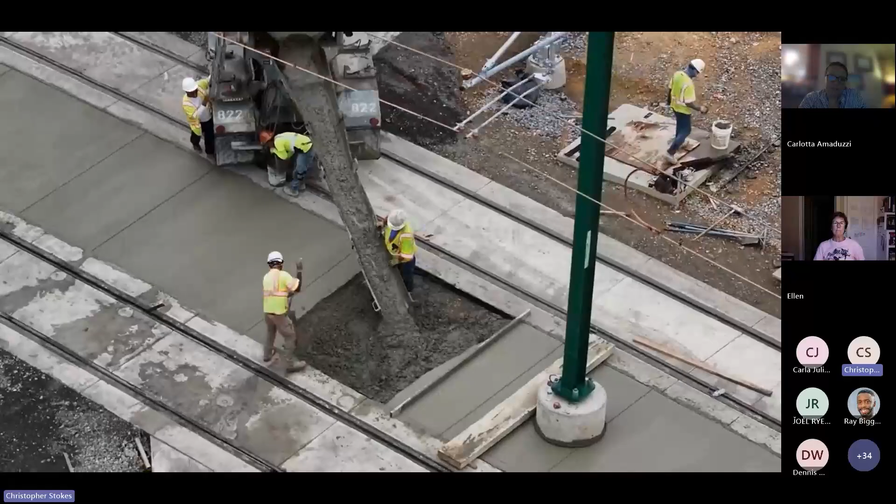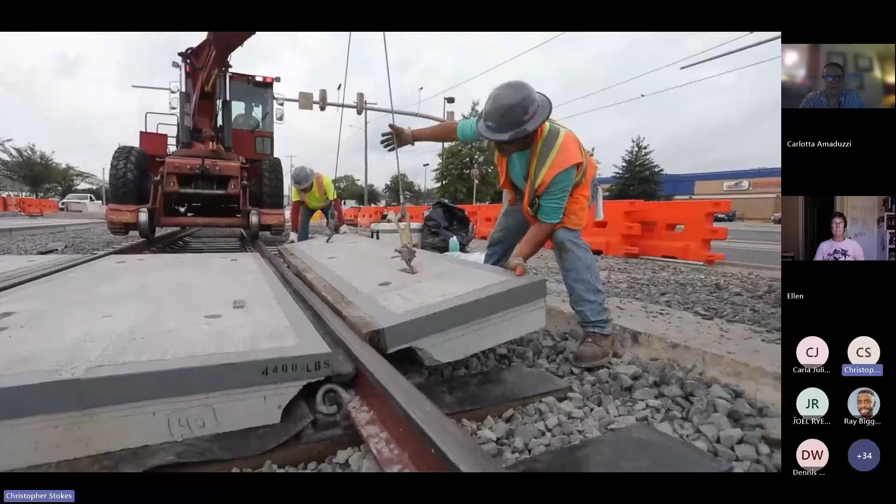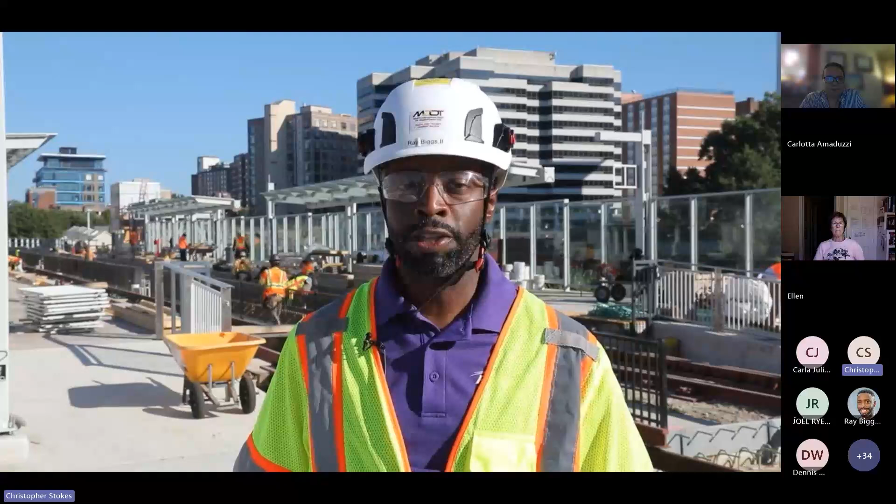It has truly been the year of transformation for the Purple Line project. With construction now more than 80% complete, the new Purple Line tracks tell the story.

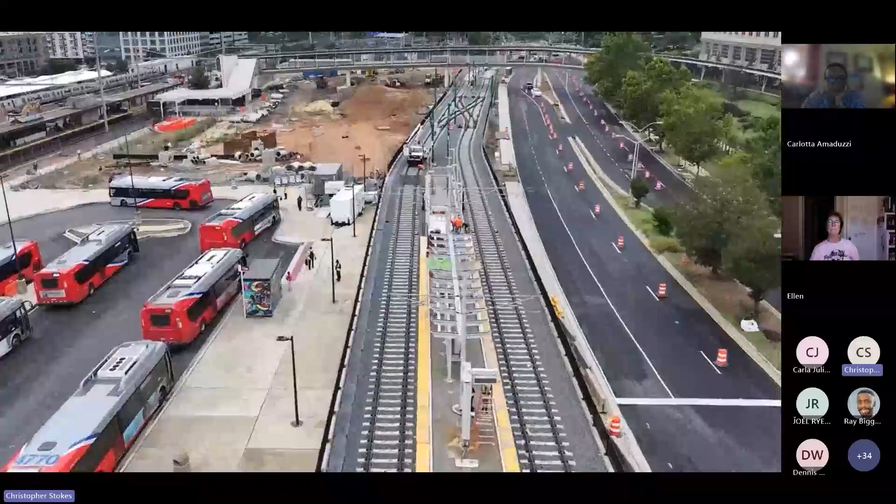We are excited to share that tracks have been installed across all of Prince George's County, with more than 75% of tracks complete across the entire project.

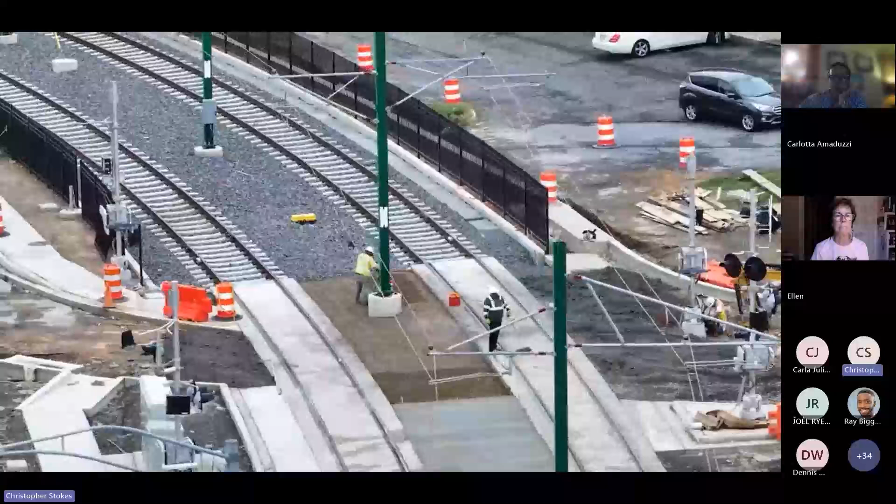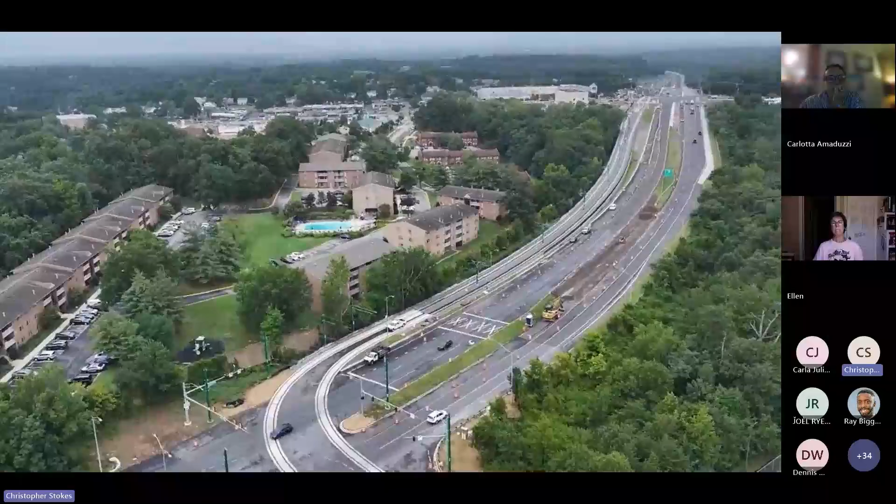Along with track installation, you have likely seen many overhead catenary system poles installed this year. These poles carry the wires that power the Purple Line. At the eastern end of the project, the poles and wires are not only installed, but have already been energized, ready to power up the light rail vehicles.

Just a reminder, always assume light rail system power is on. Please be sure to avoid the Purple Line right-of-way areas. Only cross at designated areas and crosswalks, and be sure to look both ways before you cross.

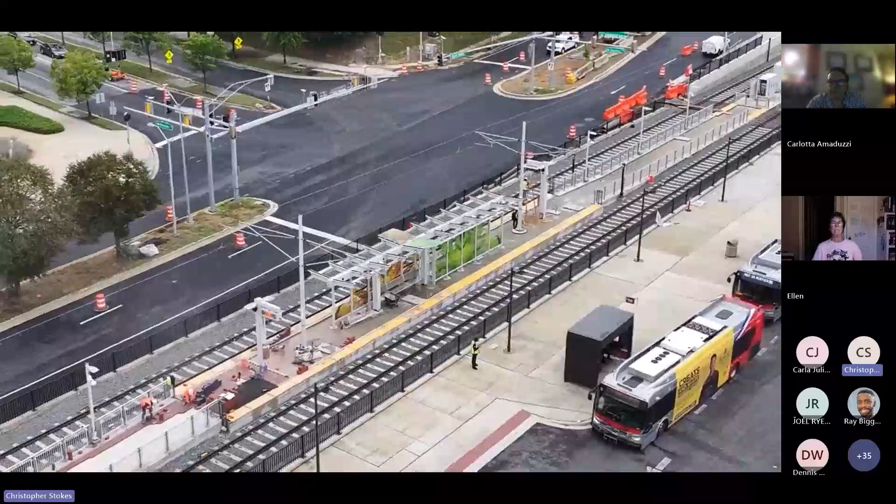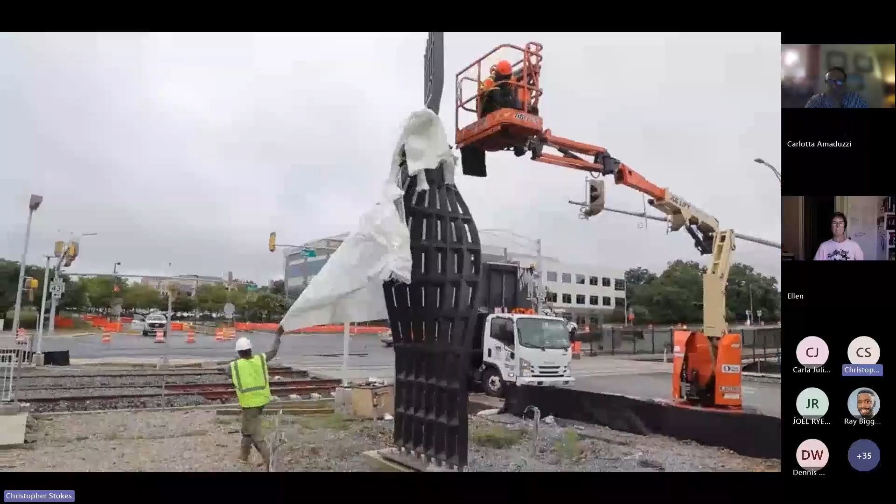Across the corridor, stations continue to progress. Canopies, benches, and Art in Transit installations are being added. Bronze spires in Riverdale, vibrant colors in Long Branch, and more to come.

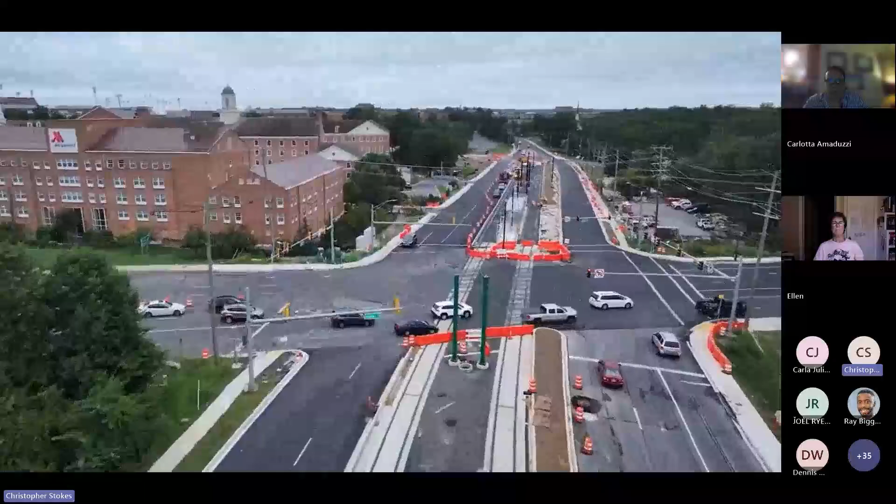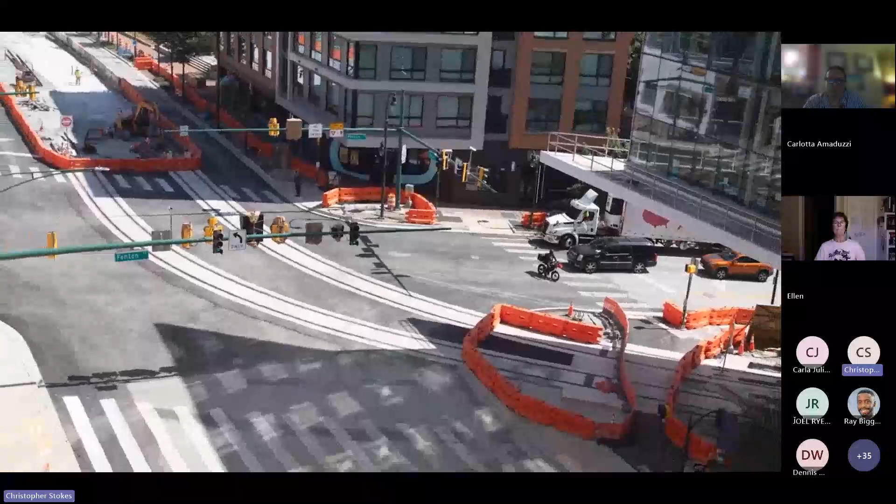More than 20 roadway crossings that once required detours are now in their completed phase, including the complex intersection of Wayne Avenue and Fenton Street. With the tracks in place, Silver Spring residents can see the vision of a more connected community becoming reality.

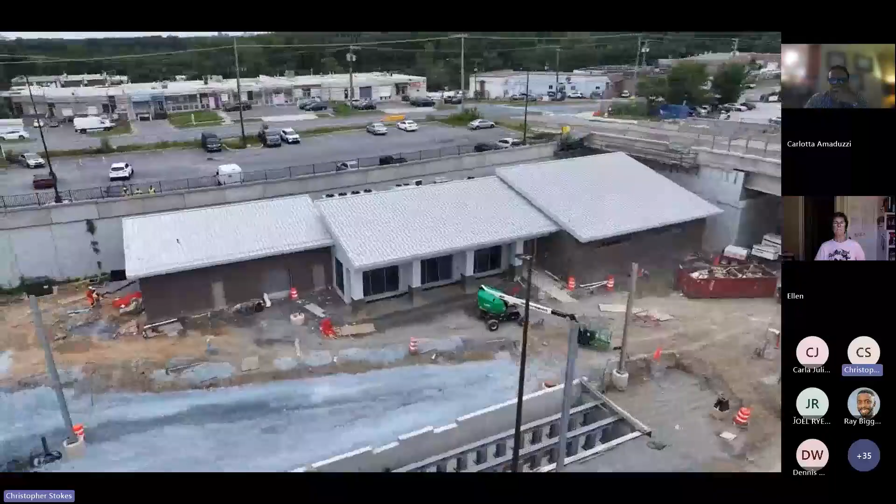In Lyttonsville, the second operations and maintenance facility is taking shape. This building and track yard will support the light rail vehicles with an additional control and communications facility and a smaller maintenance facility located in Montgomery County.

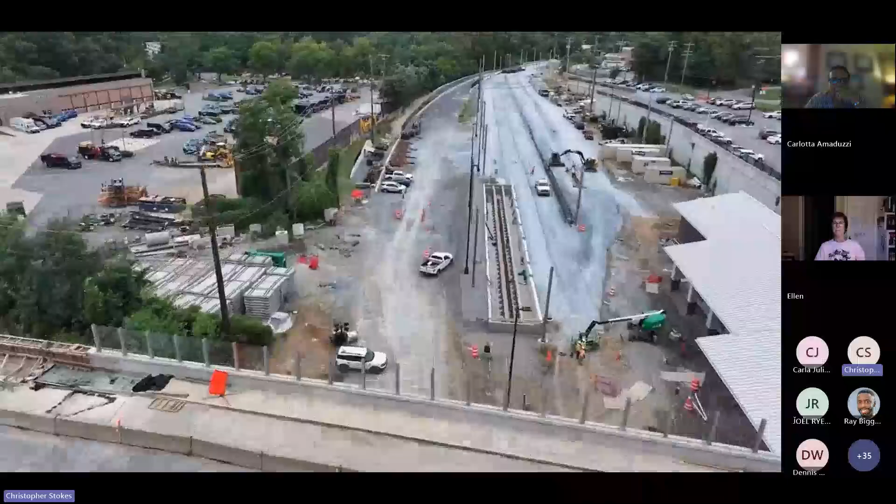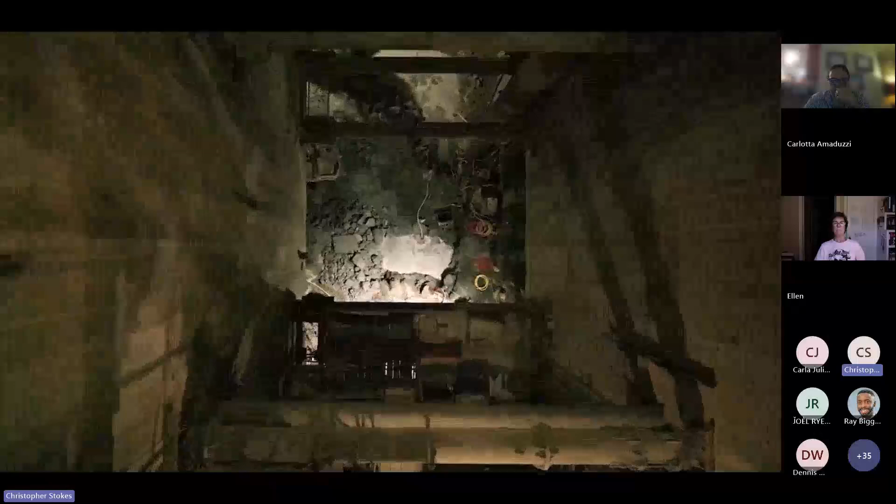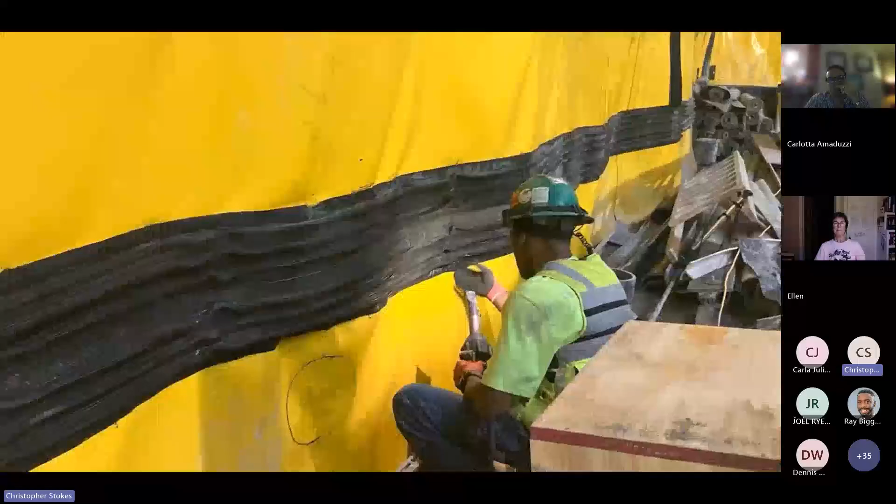Another major milestone is the completion of blasting in Bethesda. After years of excavation, the shaft and cavern, located nearly 150 feet, or about 15 stories underground, is finished. Crews are now focused on waterproofing and concrete work, building out the cavern and elevator spaces.

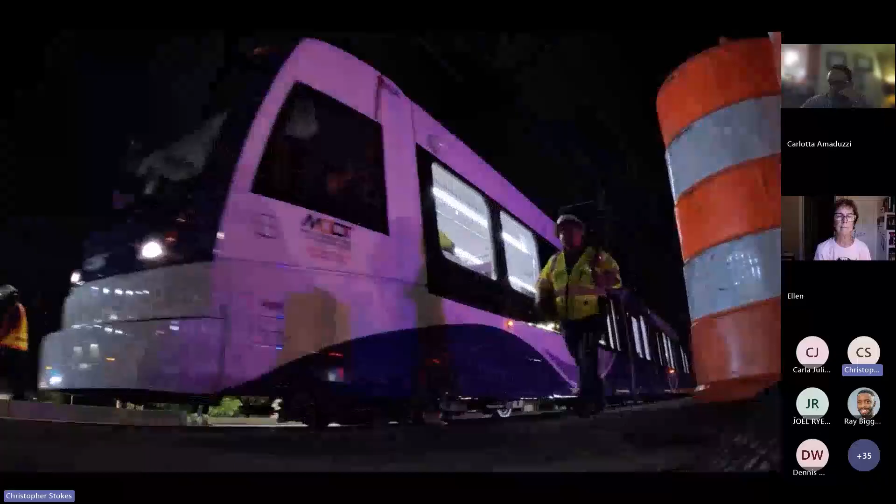Perhaps most exciting during our year of transformation, dynamic testing of the Purple Line has begun. Light rail vehicles are running during nighttime hours between the Glen Ridge Operations and Maintenance Facility and New Carrollton. The vehicles and track systems undergo rigorous checks of safety, operational, and communications. With New Carrollton testing underway, it won't be long before testing expands westward along more sections of the Purple Line.

Seeing a Purple Line light rail vehicle arrive at the first of our 21 stations is an exciting reminder of the hard work and dedication all of our teams bring every day to complete this transformative project. Thank you for your support, patience, and engagement over this past year. We at Maryland's Purple Line are looking forward to coming to a station near you soon.

Tonight, you will see and hear more details about the expanded dynamic testing milestone achieved earlier this summer and mentioned in the video, and where the Purple Line will expand this dynamic testing throughout this fall and into 2026.

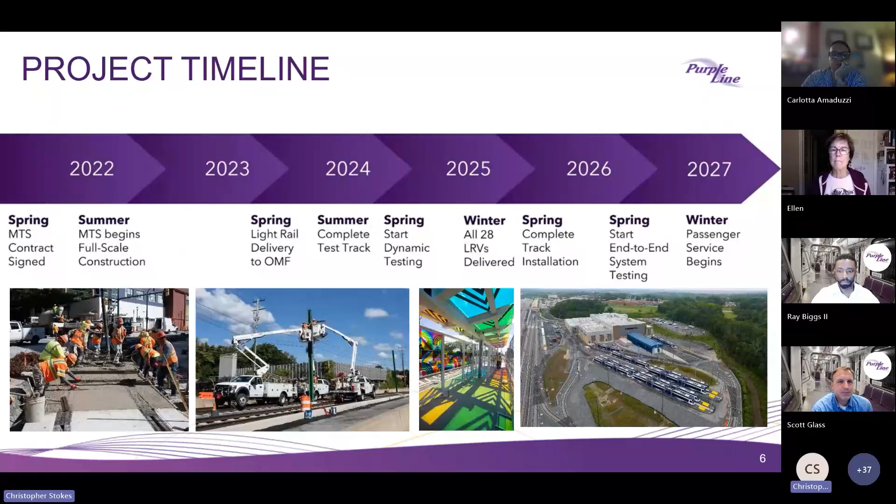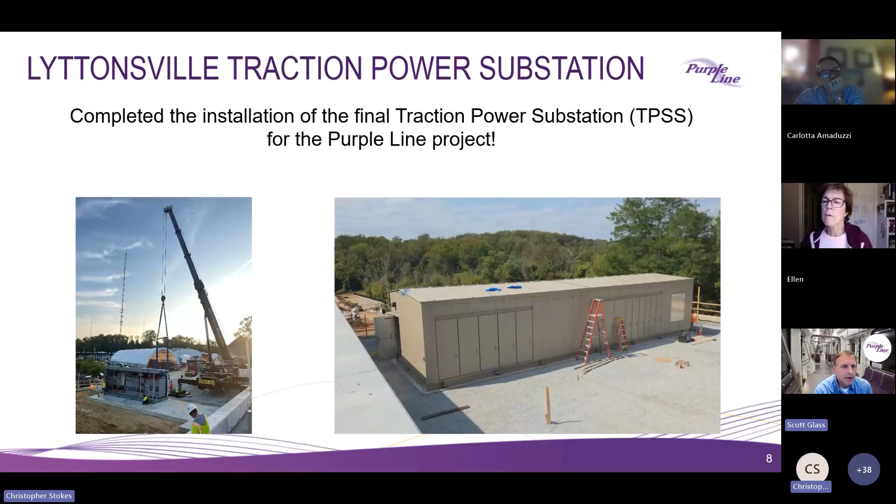So our construction update begins here in the Lyttonsville Traction Power Substation. This is right outside of the Montgomery County Maintenance Depot. We've recently completed the installation of the final traction power substation for the Purple Line project.

Adjacent to this location at the Rock Creek Park connection with the CCT, we've completed retaining walls between Jones Mill Road, Rock Creek Bridge, and the Rock Creek Trail connection. We've completed the Capital Crescent Trail underpass. We've completed the East Stream Bank slope stabilization, and we've been continuing the trail connection from the CCT to the Rock Creek Trail system to near readiness for asphalt.

Upcoming work in this area will finish the finishing railings on the CCT pedestrian bridge over Rock Creek. We'll complete the fencing through this corridor, and this week we will be starting all of the rail installations down through this corridor, and then followed by the overhead catenary system and poles and wires.

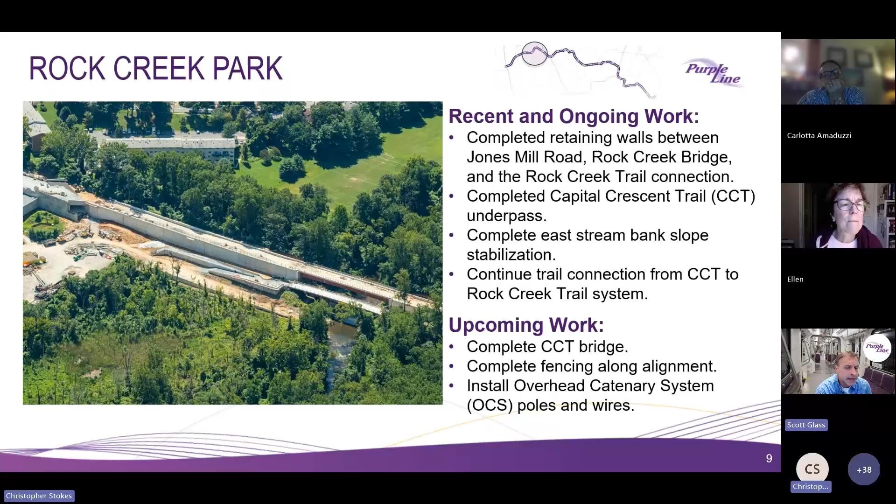Next slide. In the Lyttonsville yard, we have recently completed the LRV maintenance pit at the operations and maintenance facility and installed all of the overhead catenary foundations in this yard.

We've continued the construction of the Montgomery County and Lyttonsville operations and maintenance facility. We've completed all of the track drain, track subgrade, the ballast curb, and the fine grading for all of the rail construction in this yard area, and we've been working hard on installing a lot of track in this Lyttonsville yard.

In the quarter coming up, we'll be completing all of the interior work and finalizing the OMF building in the next 2 months. We'll complete all of the track installation on these yard spurs, and we'll then follow and finalize all of the installation of the OCS poles and wiring.

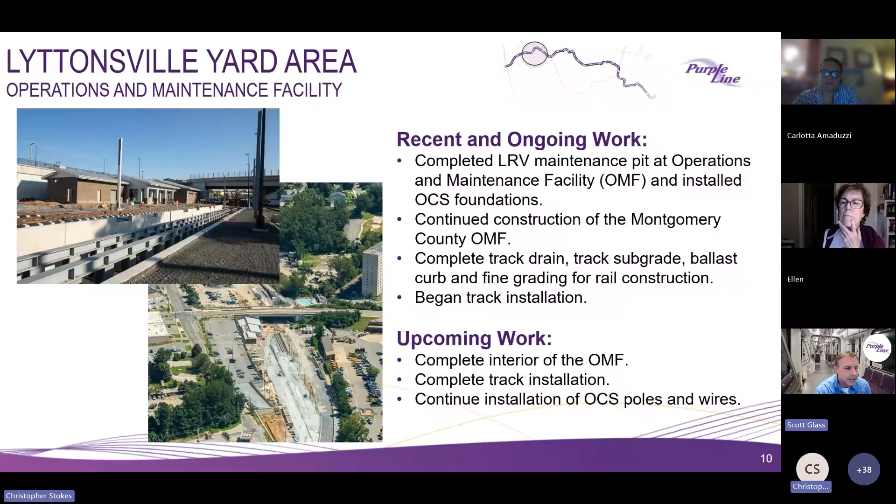At the Lyttonsville station, we have completed the CCT connection ramp retaining walls and completed the station platform and canopy. And we've recently installed the Art In Transit elements.

We've been continuing the elevator tower and main stair access and all of the mechanical and electrical work inside of those. And in the next few months, we'll be finishing all of the station elements and continuing the walkway and station access construction, finishing that, and installing the track through this station.

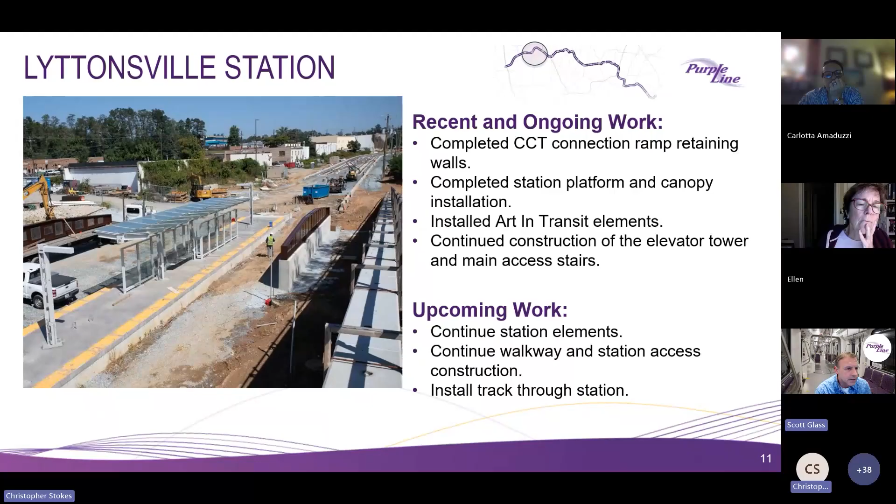Here's some photos of the work where we were erecting the art in transit, which is a structural steel girder with some artwork on it at the access tower and alongside the platform.

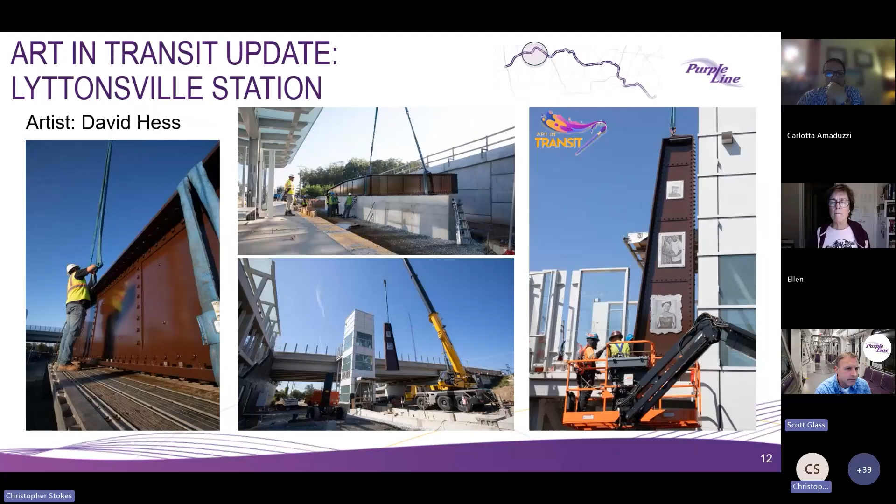Just to the east at Stewart Avenue, we have completed the Phase 2 underground stormwater filtration system that is just to the west of Stewart Avenue. We've completed the track installation across Stewart Avenue and continued the track installation from Stewart west toward the Lyttonsville station.

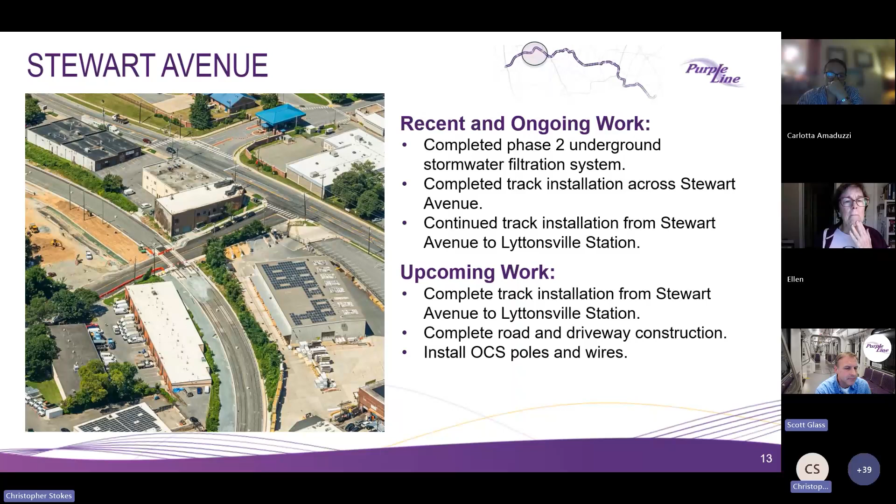In the next quarter, we'll be completing all this track work installation up to the Lyttonsville station and finalizing the road and driveway construction, and then following through in this month with the installation of OCS poles, and then followed by the OCS catenary wiring.

On the Capital Crescent Trail, the CCT, from Grace Church Road to Spring Street, we've had a lot of activity progressing on continuing underground storm drain utility placements, and a lot of walls in progress, continuing retaining wall construction between Grace Church Road and Spring Street.

This corridor in the upcoming quarter will complete all of the retaining wall construction and the utility lighting for that section of the CCT trail, and then we'll be asphalt paving the CCT trail this spring.

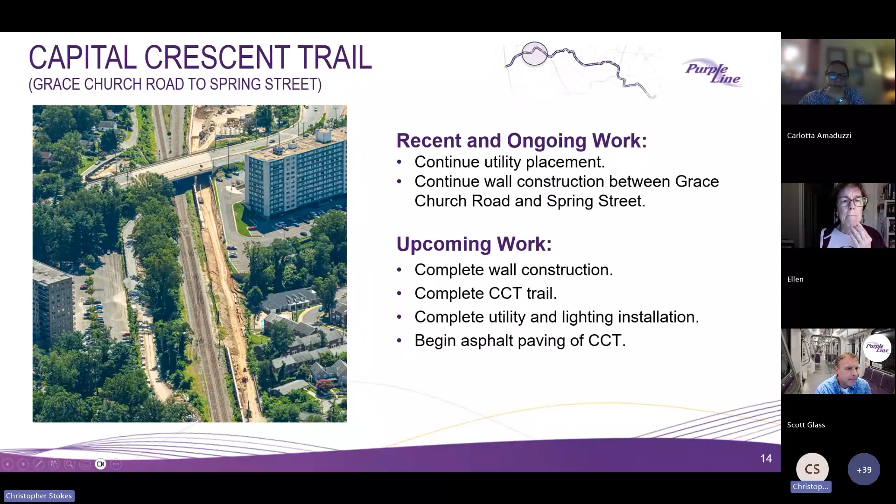From Talbot Avenue, this whole corridor from Talbot Avenue up to Spring Street, we've been completing support of excavation activities for crash wall installation between the Purple Line tracks and the CSX tracks. We have completed a major underground 72-inch storm drain crossing underneath the CSX and WMATA tracks.

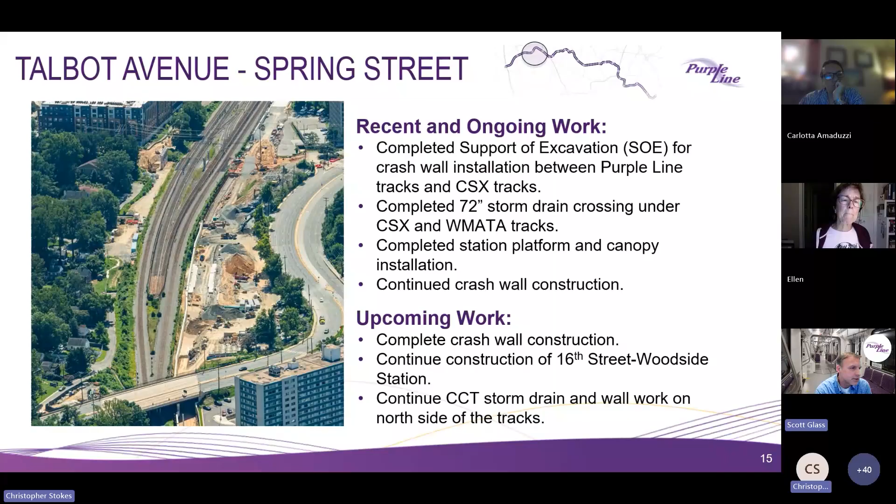We have been continuing closing all of the gaps in the crash walls in this corridor from 16th Street up to Spring Street. Upcoming work will be completing crash wall construction between Talbot Avenue and 16th Street, and continuing construction of the 16th Street Woodside Station. We'll continue the CCT storm drain and the wall work on the north side of the tracks between 16th Street and Spring Street.

The Spring Street Bridge. This has been a very daunting task for us to overcome some challenges that we've had. We've gotten through a lot of the underground work at the abutments and foundations for this bridge.

This work required extensive excavation to install a new stormwater management system about 45 feet below the track elevation, tying into the previous storm drain system. It's very space constrained, and it requires extensive coordination with CSX and the MARC train system, as well as the WMATA tracks operating system. There are 7 different utilities on the aerials crossing this location.

So it's been a lot of work to coordinate with those utilities to relocate them temporarily, and we will be relocating them permanently. The project continues to step up the work at the bridge, including additional crews and shifts.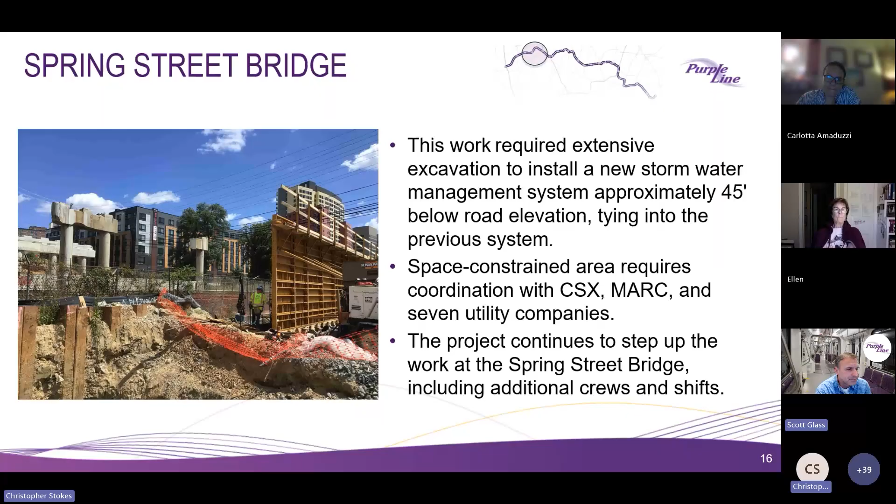Recent activities: we've completed the demolition of the old bridge that was not finished last summer. We've started the installation, and we're in the process of finishing the erection of the girders over the CSX and the metro tracks. We've been continuing with the underground storm drain utilities in this area.

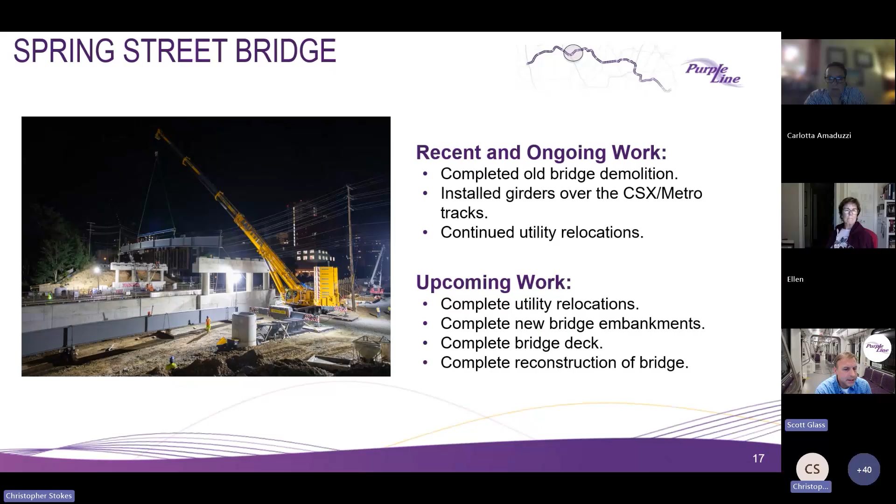Upcoming work, we have a lot of activities that are really starting to ramp up as we have now finished the girder erection. We'll be completing the utility relocations, completing the new bridge embankments, completing the bridge deck, and completing the reconstruction of the bridge.

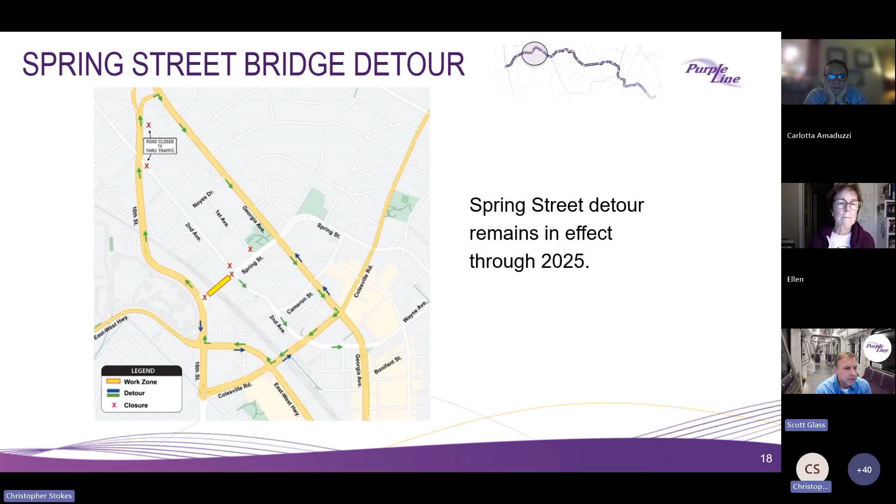This is a photo of the detour that's currently in progress for the Spring Street detour, which will remain in effect through the end of 2025.

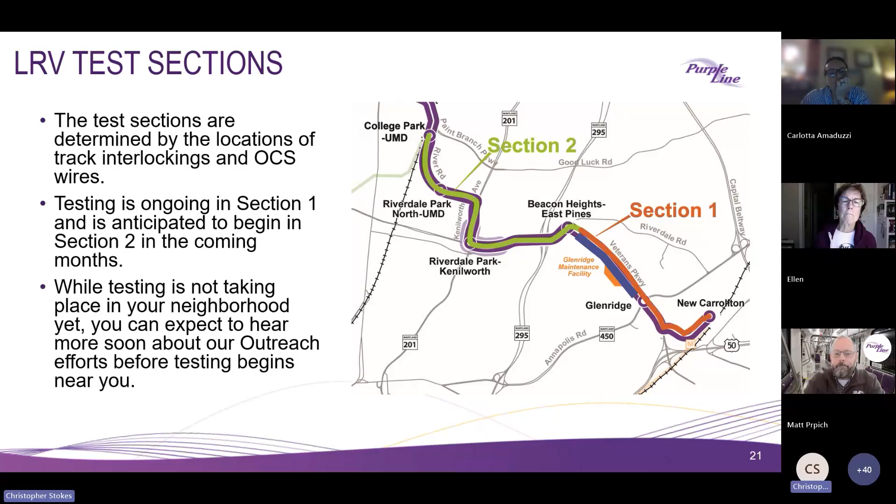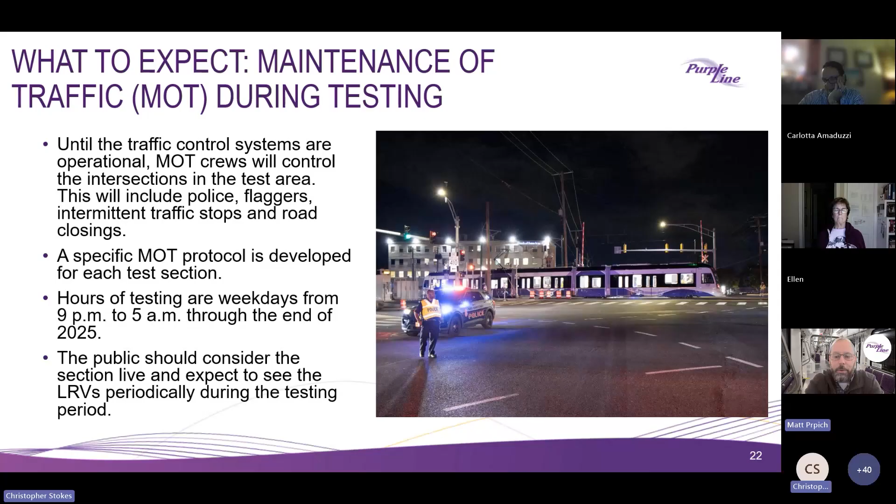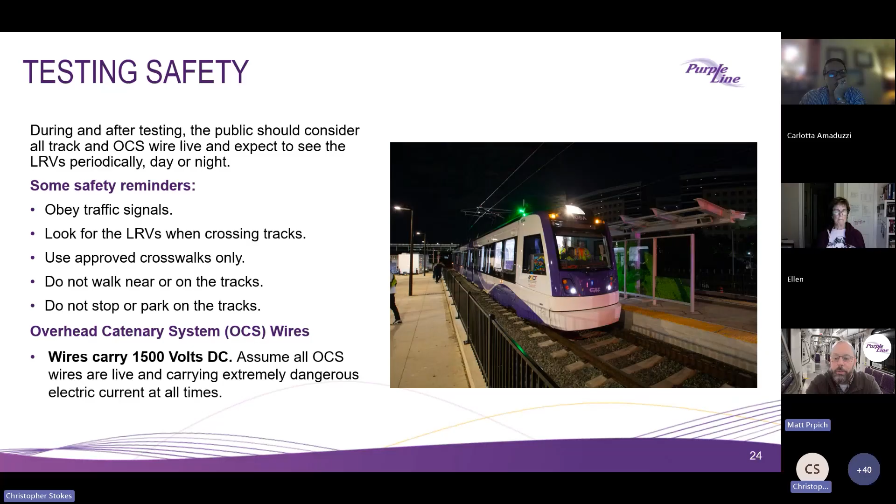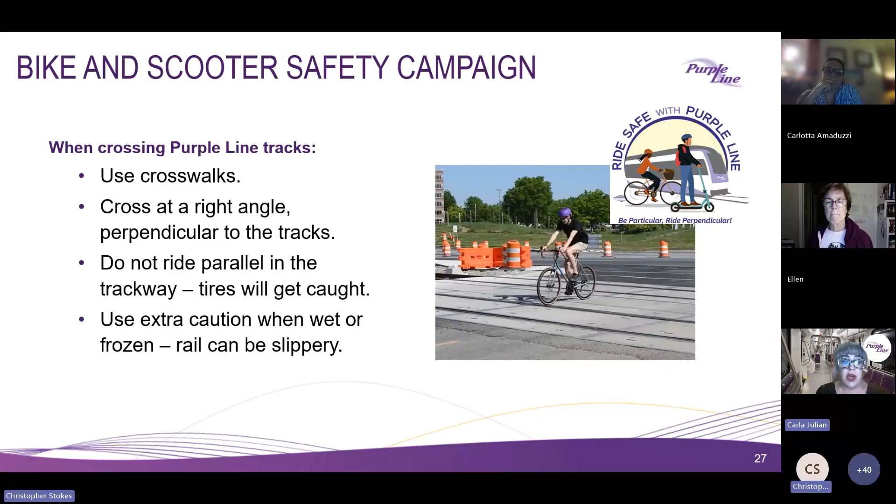As safety is always our number one goal, as the rail starts to go down and is tracking in Montgomery County, make sure that you are using the appropriate crosswalks, and that if you are on a bike, you are crossing at a right angle, perpendicular to the tracks. You don't want to ride parallel; you might get stuck. Make sure you're using extra caution in wet or frozen conditions outside.

Again, we'd like to thank our community advisory team members for all of your engagement. MTA has worked closely with the CAP members to get ready for these meetings. We are always looking for your input, and we thank you so much for your time and commitment to do these meetings and take the feedback and share it with all of the communities.

With that, I'm going to turn it over to John to talk about some community grants. Thank you, Carla. We're always pleased to join these CAP meetings and speak about our Beyond the Rails community grant program. The aim of our program is to provide funding for nonprofit groups to pursue their missions and make our area an even better place to live, work, and play.

For our next round of grants, the deadline to submit is just 6 weeks out. They're due November 30th. So if you're involved with a group doing good works in our community, we encourage you to visit our website at Purple Line MD and use the resources drop down and submit your applications. We'll soon thereafter be evaluating those applications and letting the awardees know if they've been awarded a grant. So we encourage you to apply.